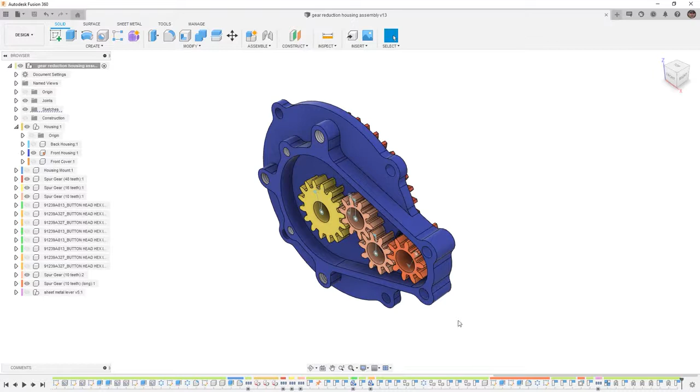In Fusion 360, we want to carry on with our gear reduction housing assembly. We've created as-built revolute joints for all the gears in our gear train. But what would happen if one of the gears was not in the correct position? If we hadn't used a line and we wanted to still create a joint?

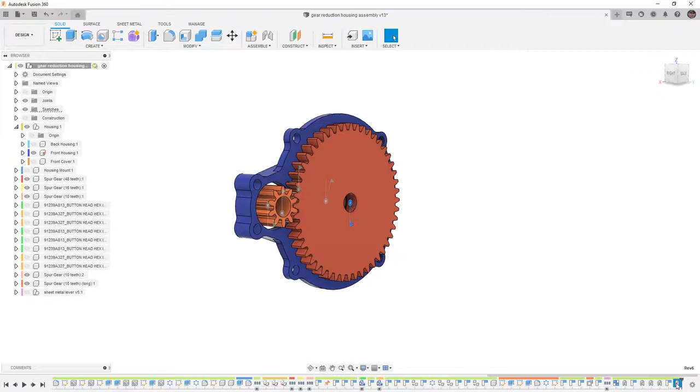Well, we can go to the last as-built revolute joint we created, and I'm going to select Delete on the keyboard to get rid of that capture position and to get rid of that revolute joint. Then I want to move this gear out of position and capture it.

So if your gear was brought in and it was not in the correct position, you can still create a joint by going to Assemble and selecting Joint. Remember, as-built joint makes use of the current position of the component.

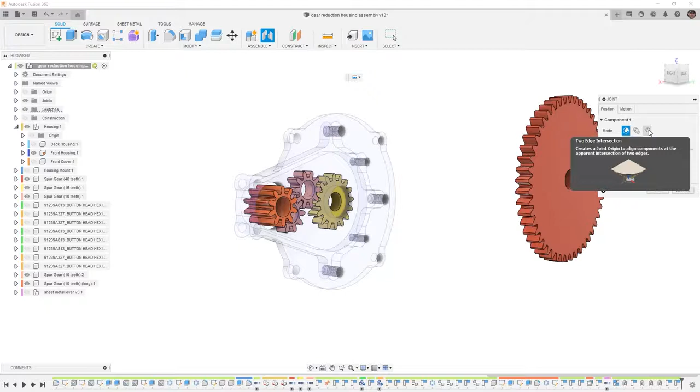A joint will allow you to select the points on multiple components that you want to align. This can be done a few different ways. Simple will allow us to select a reference point. Between two faces will allow us to select two faces and it'll automatically go to the middle, or we can select two edge intersection. The first thing that I'm going to do is first set my type to revolute.

And then for the position, I'm going to start by rotating my gear around. And similar to how we used a line, I'm going to hold down the Control or Command key and select that center point, noting the orientation of X, Y, and Z, Z being our blue axis.

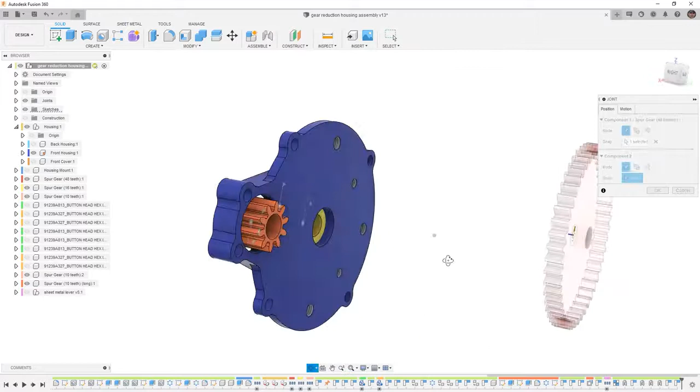Next, I need to select where this is going to go. Once again, holding down Control or Command, I'll go to the center point of this opening, noting the direction of the Z coordinate system. Once it's in position, note that it's automatically set to 0 degrees, and the offset values here are all set to 0.

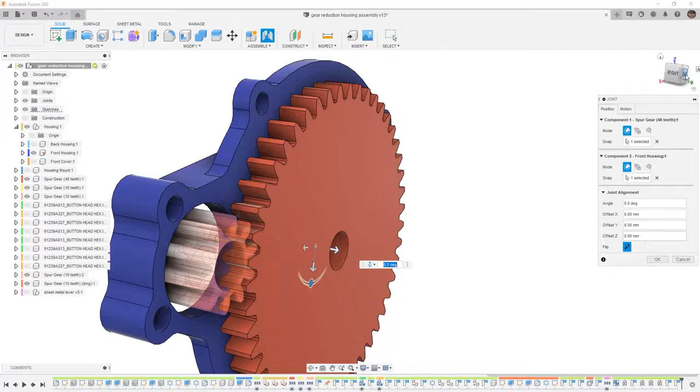Even though we manually selected those positions, we could still offset them or rotate them if we wanted to. You'll notice that there is a slight amount of overlap here, so we can use the on-screen manipulator to rotate their position, noting that we want to go to about -3 degrees. And you'll notice that we're getting more overlap.

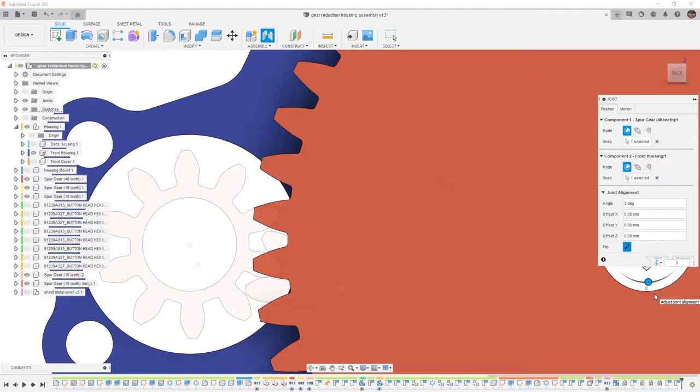So if we go to +3 degrees, we're starting to go the other way. All of our other gears were about 20 degrees off, and it looks like this one is still a bit more off than that. When we get to 30 degrees, we're much closer.

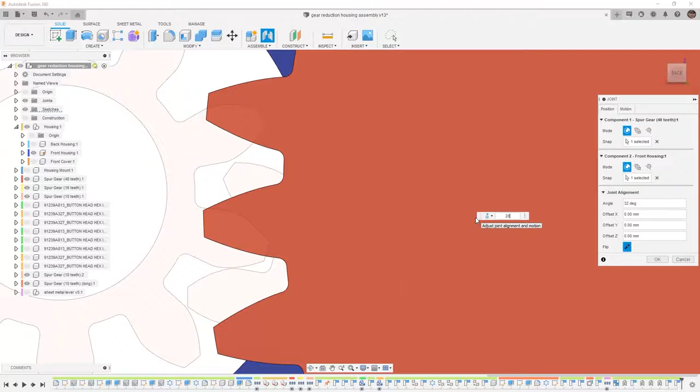So I'm going to insert a value of 32 degrees to see if that gets us close enough. It's going the wrong way, so we can go backwards to 28 degrees. If we're having difficulty at this step, we can say OK, and we can manually rotate this around and capture its position as well.

Now that we have that new joint added, we want to add motion links between our different joints. To do that, we'll go to Assemble and we'll select something called a motion link. The main motion link that we want is between our 16-tooth and 48-tooth, but we're going to work our way through the gear train system, starting with this joint and moving to our first idler.

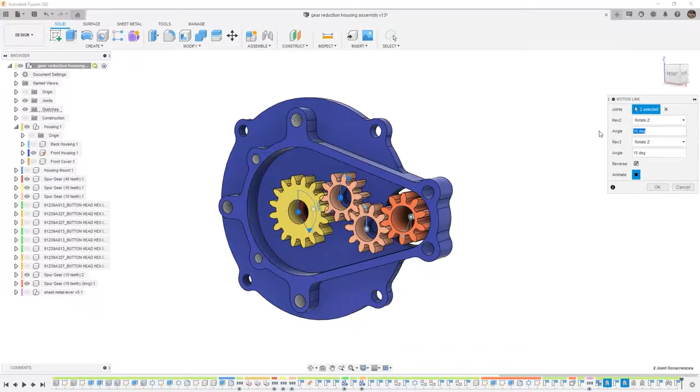What we want to do is remember that we're going based on a ratio of the gear. So we're having a 16-tooth rotation and a 10-tooth rotation in the opposite direction. Noting that that is just way too much rotation, so let's flip those numbers around, going 10 and 16. If we do that, you can see that the relationship is much better.

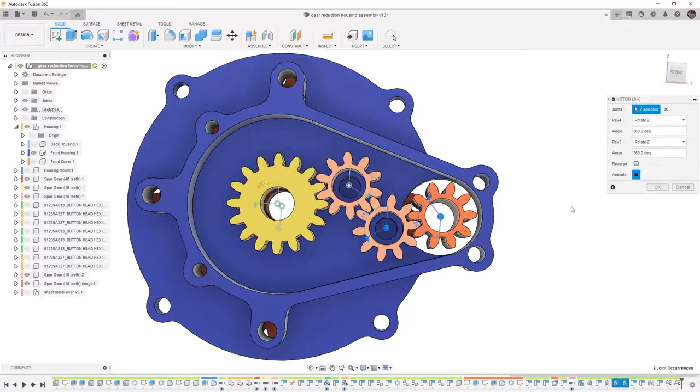We'll repeat that motion link, this time going between these two gears, reversing the direction, noting that they're both 10-tooth, so they're going to be the same. We'll do that one more time between the two idlers. You note that those are both 10-tooth, so those are the same.

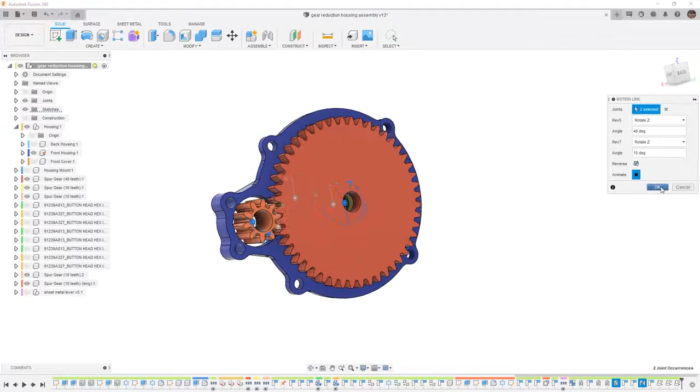And lastly, we'll repeat it one more time, going between this idler and the large gear. Now this is going to be 10-tooth in and 40-tooth out. But again, we might need to reverse those 40 and 10 and reverse their direction. So now if we rotate that large gear, you should see that everything is moving as intended.

For this, let's go back to a home position and save the design before we move on to the next step.